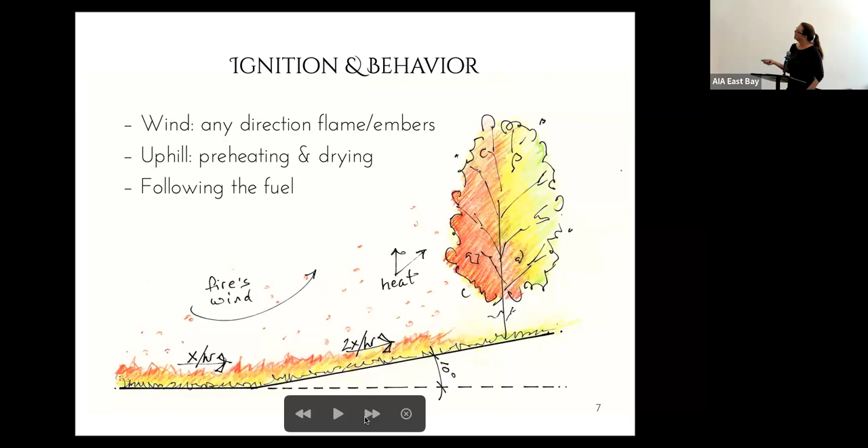Okay, so getting back to that critical thinking path. Obviously, wind will send embers wherever. They're like plankton. They can't go against the current, and they can ignite something by direct contact. They'll bring that heat, and if it's enough, they'll ignite the next thing. The flame front is also super obvious for our critical thinking path as it's climbing up, following fuel. That's really intuitive to understand. You can see that everywhere. And having something burning nearby so that that heat energy transfers by an indirect means.

I took a class on firefighting at Merritt College, and the best point I got from that class was that the biggest threat to your building is the building that's on fire next door. That next door building is the biggest threat. That's really terrifying if you know your neighbors.

Is this the next slide? Whoa. Oh, we're on a roll. There we go.

Okay, so the defensible zones were developed in the 50s and 60s as a theory. We've totally studied it now scientifically and demonstrated that the defensible zones were a good theory. They are there to delay ignition and to minimize exposure, to slow the fire's progress, to basically put tacks in its path as much as we can, to lower the flame height. Anytime you can take a fire, and I'm going to use this word badly, calm it down, literally down, and lower that flame height, the fewer things it has a chance to throw, and just get it down where it's much more manageable, and reduce its intensity.

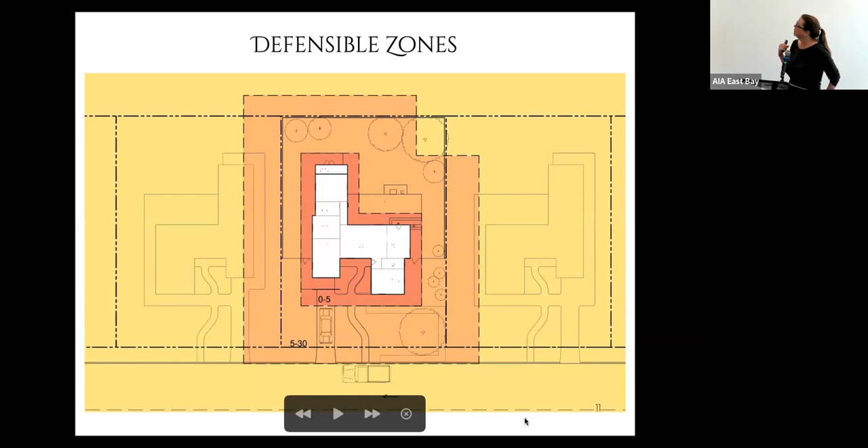And when we call these spaces defensible, there's a lot of assumptions that I think happen for lay people. They assume it will be defended. That's not necessarily true. We need to think of them as a way in and out, and they have limitations. So embers don't care if you've drawn a line in the sand. Okay, next slide. So the defensible zones are just demonstrated here on a modest house. I would skip all the nooks and crannies and just call the 0 to 5 the outside walls. And if there's a nook or a cranny, don't get too fussy about trying to cut those inside those corners. Next slide.

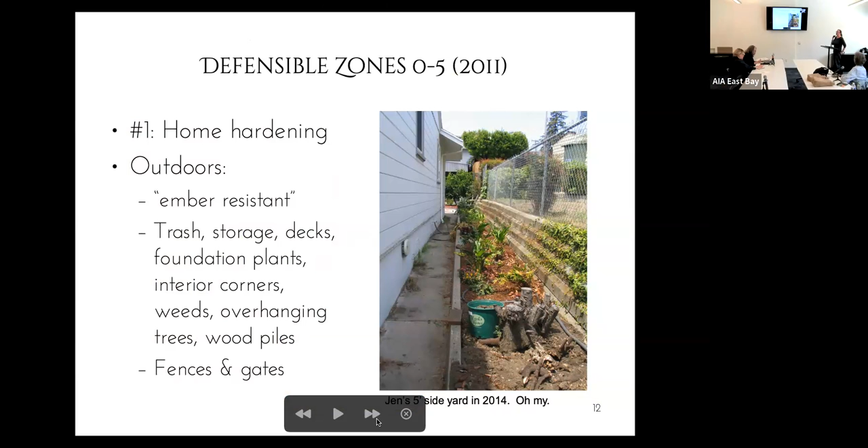Okay, so this is one of my side yards. It's 5 feet wide. What the heck am I supposed to do when my path is only 2 feet wide and the whole property line is 5 feet from the building? So number one, home hardening. Number two, in the out of doors, we want things to be as clean and tidy, ember resistant, and difficult to ignite as possible. Next slide.

And the 5 to 30 zone is pretty much just an extension of the same thing, but we want to also not forget things like sheds, pathways, long driveways. All of that stuff should also be defensible so that you have a way out and they have a way in. I'm going to skip that business about the neighbors for time. Next slide.

Okay, so like I was saying, the way out along driveways, paths, trails, if you're counting on using a particular route to get out of your neighborhood, you might take a real close look at that. Or if you have a home that's more rural, really look at how you can get out of there. And what if the main way is blocked off? Is there another way out? It's not one and done. You've got to maintain these defensible zones. You can't just buy them, put them in place and call that good. Next slide.

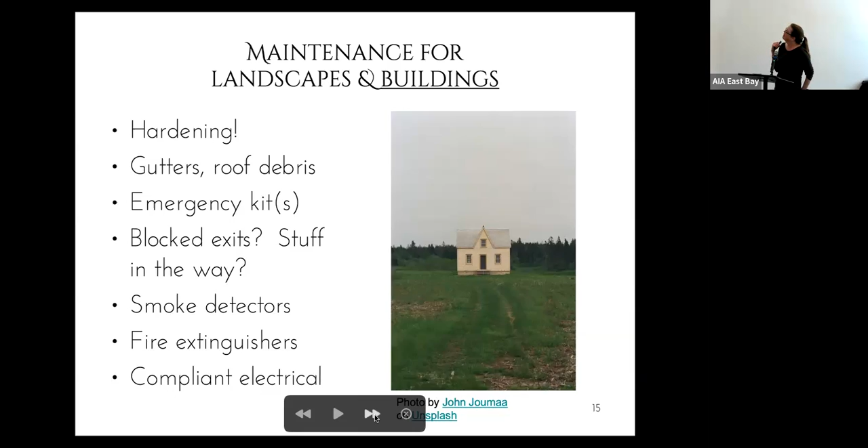Okay, so maintenance for landscapes and buildings. I'll focus on buildings here. Hardening, obviously, gutters and roof debris, having those emergency kits and your go bag, blocked exits. I have a downstairs at my house and the back door we hardly ever use. And I was storing things in front of it. And then I started studying fire and I went, oh, okay, no, let's not do that. Making sure your smoke detectors are up to date, having fire extinguishers, and your electrical work needs to be compliant, needs to be solid so that it doesn't create heat and cause a fire. Next slide.

Okay, landscapes are much more my jam. So hardening your outbuildings, sheds, pool, those little sheds that you put pool equipment in, all of that stuff. No trees should be overhanging your roof line. Your egress paths need to be clear. You want to keep the corners clean. You'll see that in the next slide. Doormats, this is something I picked up from Cheryl Miller. If your doormat is really easy to ignite, like those jute things, maybe it shouldn't be in your path out of the house. And not stockpiling firewood and mulch really close to your egress paths where it's easy to get to. We've got to rethink that. Next slide. Here we go.

Seasonal cleanup, obviously, thanks to this slide, is important. Pruning your plants, your trees and shrubs for their health and not just shearing them into rectangles is important. Next slide. Keeping the corners clean. Anywhere leaf debris and dry little stuff and trash can get blown into, embers will collect there. So you've got an obvious, really intuitive way of understanding where your vulnerability to embers might be.

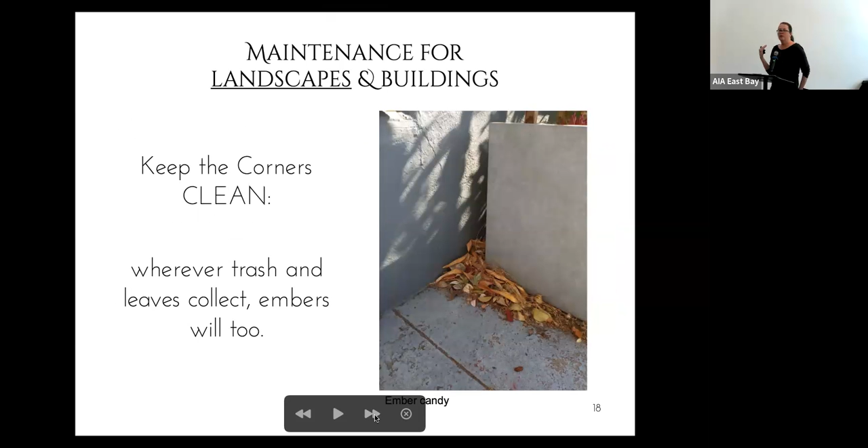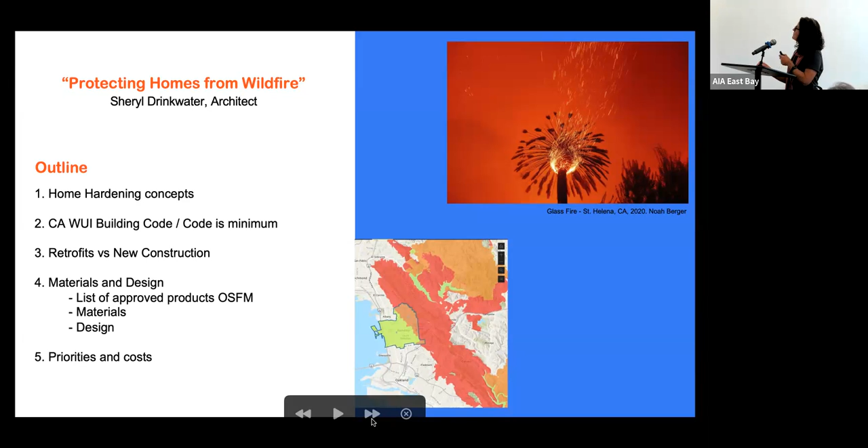So we are going to be covering these areas. And I'm kind of curious, maybe in the Zoom, in the chat, I'm just wondering if anyone has never heard of home hardening. I mean, everyone here in this room, I believe, has, but on the Zoom, I'd be interested to know. We're going to do kind of a quick deep dive into these sections, 5 sections in 20 minutes.

So home hardening. When I was in Paradise, as I mentioned, I was an inspector for the state. We saw a few different outcomes. We saw a number of homes that showed no damage. Some landscape structures and accessory buildings were damaged, maybe destroyed. But a lot of these newer homes survived. So they were built to the newer code. So that's something to think about as we go through this.

Research shows that the risk to your home is likely to come from flying embers. This is something that Jennifer mentioned. Using science, we fortunately know a lot of the risk factors now that lead to these wildfire disasters. And we have a good understanding of it all through something like this image, which is the IBHS, Insurance Institute for Business and Home Safety. They have this big laboratory in South Carolina. They build full-scale structures, and then they hit them with these fire cannons, which simulate embers, and then they study the results. And we're going to see another image in a minute.

So home ignitions result from conditions local to a home. Again, Jennifer has been great at doing the background on this. So the vulnerabilities principally determine those ignitions, and this area of the home and its immediate surroundings is called the home ignition zone. This was one of the first times we heard home ignition zone, probably almost 30 years ago, by Jack Cohen. He is a scientist, a forester for the Forest Service. He's kind of the grandfather of home hardening.

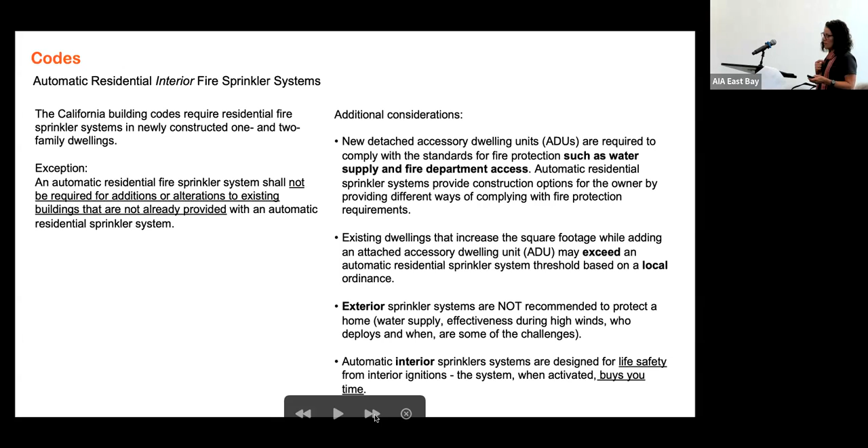Okay, so we're going to touch on retrofits versus new construction. So it's much easier to build a hardened home from scratch. New homes can meet the requirements starting at the design phase. And we were talking about this before we recorded that there are over 7 million existing structures that are at risk for wildfire. We got a lot of work to do just to convince people with these existing homes to harden them in any way, whether we're doing a project or not.

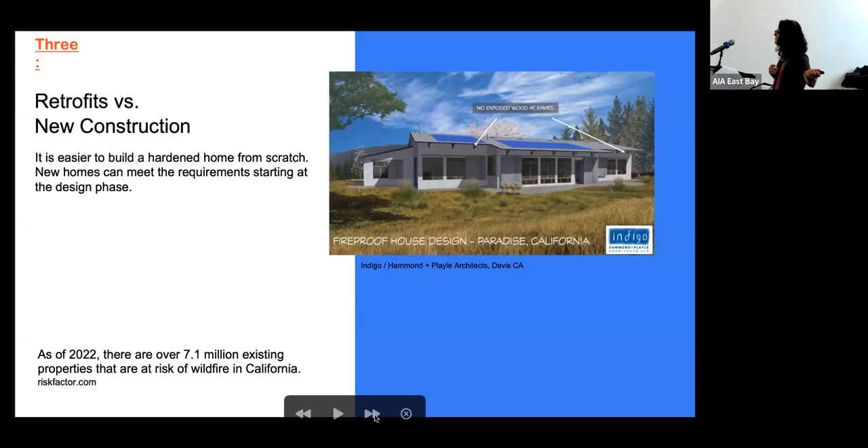So this is one of the good examples to show for retrofit and for new: eaves and roof vents. This is a big retrofitting project that can be very simple and it can be very complicated. There are so many designs, right, for roof overhangs and roof eaves. So we probably all know that vents are designed to create airflow and remove moisture above and below the living space, but they also create air pressure that can draw the embers inside and ignite the combustible materials that a lot of us might keep in our attic or crawl spaces.

So the code and the voluntary recommendation is to use approved ember resistant vents, which there are many products. For example, the gable end vent here has a bushfire mesh, a proprietary vent that has a very tight steel mesh. We can retrofit an eave with a closed soffit, like in the example at the top. It can be vented or not, depending on the roof assembly. And we can voluntarily screen the vents and retrofit eaves. And here the recommendation is 1/16 to 1/8 inch. So it's smaller than the vermin size, which is typically 1/4 inch, to prevent critters from going through these vents.

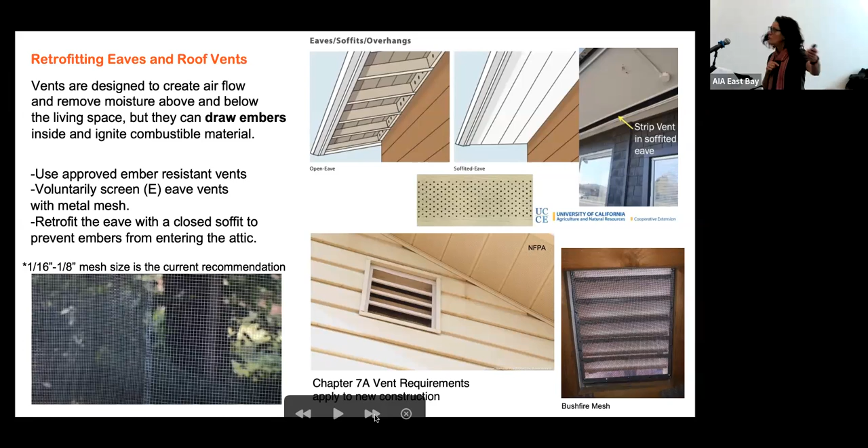So now we're going to move into materials and design, which I think of as the meat of the talk. And hopefully my time is okay, but this is a demonstration that was done in Marin by Fire Safe Marin. They have an annual event now called Ember Stomp to educate the public. And so they build these little mini versions of the lab. Steven Quarles is usually leading it. He worked for IBHS. He's one of my heroes in this subject matter. So they build these little sample home sites using cedar shingle and typical home materials on the right.

And on the left, they have a quote unquote hardened home: siding is fiber cement, they've got the vents that are ember resistant, the metal gutters, and then they built a little deck and they ignited everything. And then they studied the results. They illustrated to everybody that materials do matter and that your deck is also a huge vulnerability, and even the little things on it, right? So the deck is maybe just a vehicle for all those little things to ignite your home. It might not be the deck itself. So as you can see, the one on the left, the deck is pretty destroyed. Sort of.

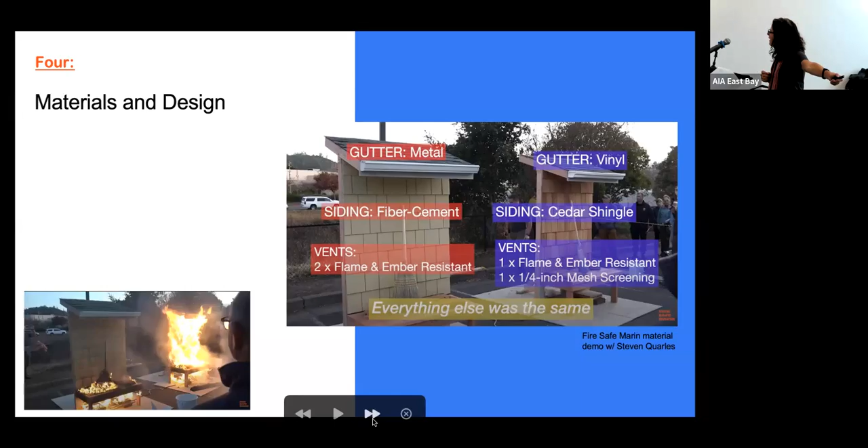Not all products out there that comply are in the book, but this is just a way to group it all together to make it easier for architects and homeowners and different manufacturers to show their products. And all I would say is if you are considering using a product and you're not sure of it, do your research, ask a lot of questions of the manufacturer, and ask for the testing information and use that testing information. Possibly it will be required to submit for permit, but just do your due diligence.

So wall assembly, we're in materials. Fire resistance rated refers to the rating of a building's wall assembly's ability to contain a fire inside that compartment and protect it from spreading. This is like that 1 hour fire resistance rated wall example I just gave, or a 20-minute fire rated door. This is really, again, about life safety. This buys time. If you're in your home and you're trying to evacuate and the wall takes longer to burn through, then you have a better chance of surviving. And this can also help your home as well.

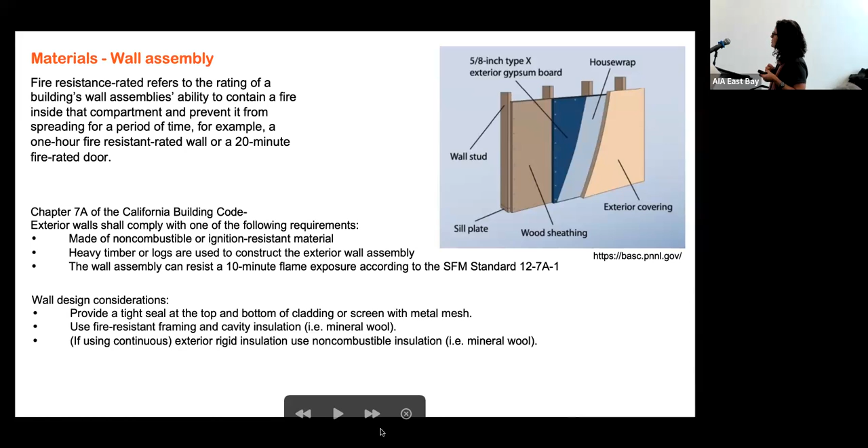Other wall design considerations: provide a tight seal at the top and bottom of the cladding or screen with metal mesh. Stucco walls kind of have this built in, but we'll see a detail of that in a minute. Use fire resistant framing and cavity insulation like mineral wool. And if you're using an exterior rigid insulation, use non-combustible, like mineral wool.

So here's some more about siding. Stucco, if it's 3 layers, almost 1 inch thick stucco assembly installation, that's probably the easiest way to comply with Chapter 7A for a non-combustible wall, as long as it's maintained. You can use metal, fiber cement; please use the manufacturer's instructions. And on the right, I just show that you should consider the edge details of your siding.

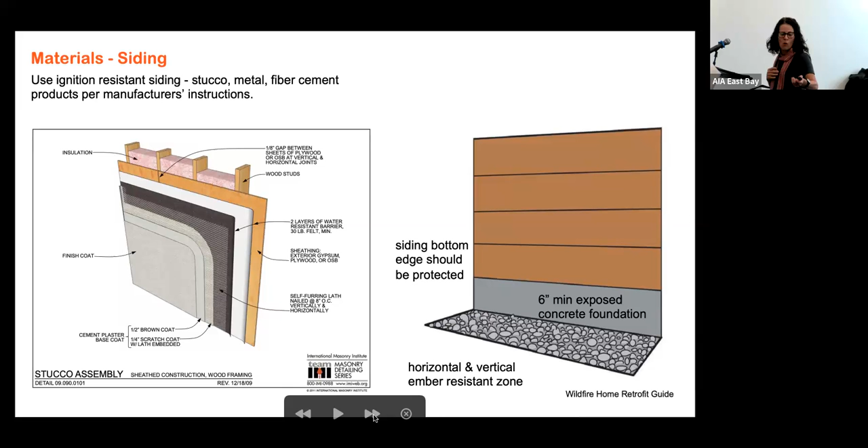And also with new construction, we are required to have a 6-inch minimum exposed concrete foundation. So this is kind of like a little vertical version of your zone 0 to create a disconnect for those embers that may hit the side of the wall and fall down. If they have nothing to ignite, they're just going to extinguish.

So the roof, I've got to speed up. A class A rated or non-combustible roof gives the highest protection. Wow, my formatting went nuts here. Anyhow: standing seam, terracotta tile, and then class A rated by assembly. This is all underneath that image, but basically it's saying that you have to have another added underlayment material like gypsum wallboard or ignition resistant plywood. And this would create a class A roof by assembly.

And then you want to consider all the details of the roof edge where the gutter attaches. And also if you have a 2nd story and a roof intersecting, this would be more of a retrofit, make sure you have flashing installed there to create a disconnect.

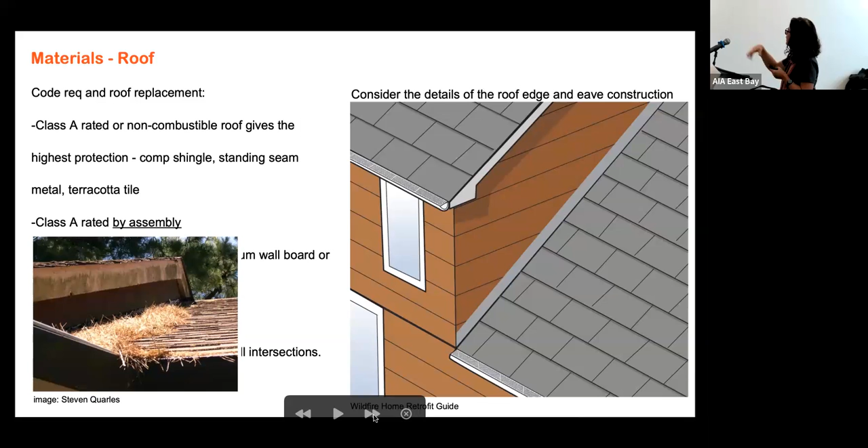Windows, the glass can break. I'm going to speed up. It occurs because of the differential in the temperature changes: the radiant heat might be right on the center of the window glass, while the rest of the glass is in the frame, so it cracks.

Chapter 7A requires multiple panes and at least one pane of tempered glass, which is stronger. And window frame materials matter. Metal clad, aluminum, fiberglass, they're all better than, say, vinyl.

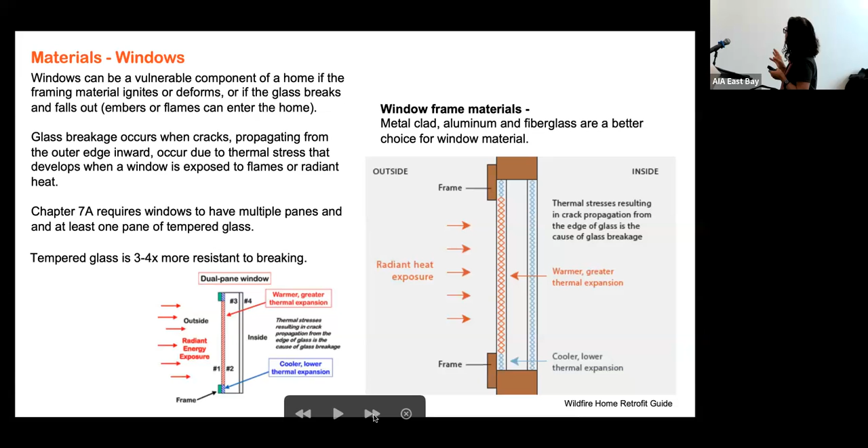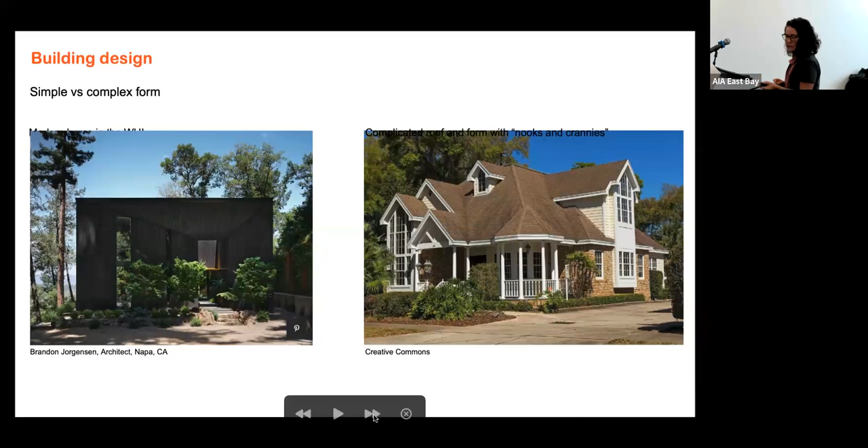And then this is a firm in San Diego. I met this architect down in San Diego, and she and her partner have started a company that has a method, and they know exactly how much it's going to cost. They use all the same materials. They have floor plans. It's customizable. And as you can see, the form is fairly simple.

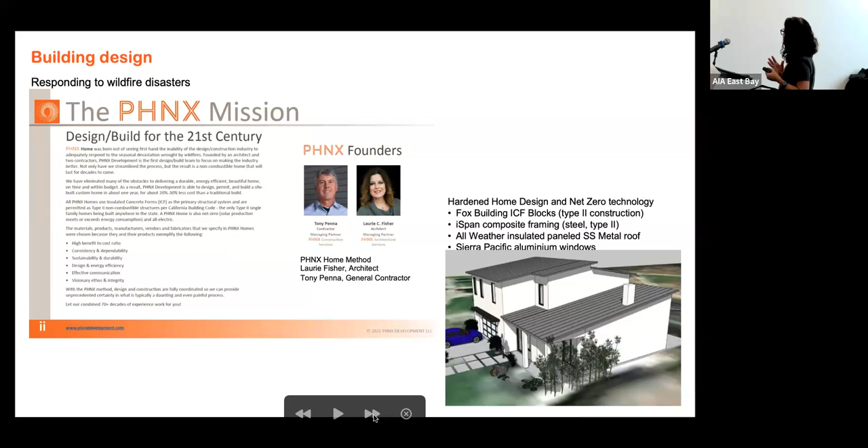It has shed roofs. They use Fox blocks, which are insulated concrete form blocks that get stuccoed. They have steel framing, insulated paneled standing seam metal roof, and aluminum windows.

And then here's another architect building a home in the Sacramento Valley, and he actually consulted with me, and he's using class A membrane flat roof, metal fascia, aluminum windows, aluminum clad windows, fiber cement siding, masonry, metal guardrail.

And then we have this firm, Indigo, Hammond and Playle Architects in Davis. They're working also on a template for homes for victims of the Paradise Fire that use corrugated metal roofs, concrete masonry or stucco. And they're also very interested in off-grid solar battery systems so that there's the potential to shelter in place during the wildfire.

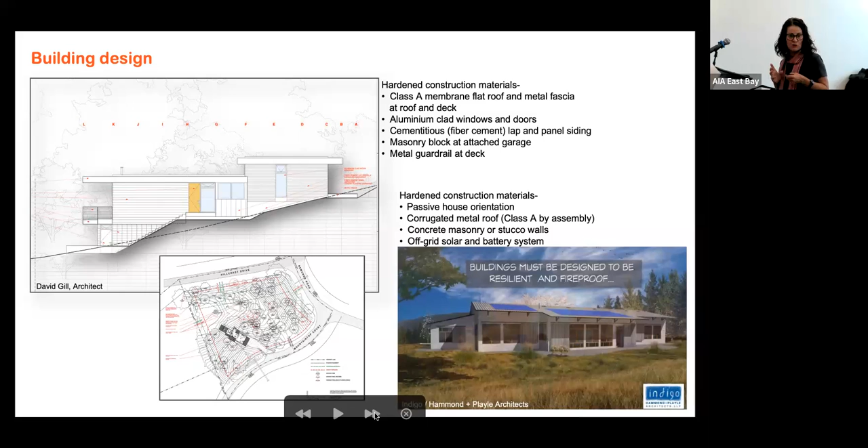And then we all know Arkin Tilt Architects here in Berkeley. They have been working in straw bale construction, clad in stucco, for years. They have all these plans that they're actually giving away to victims of Paradise and other California wildfires.

Another company, Bone Structure, they have a steel frame kit, very customizable, high-end triple pane windows, unvented roofs, and high performance insulation, which you'll have to go read about on their website. I'm not going to dig into the challenges of that right now.

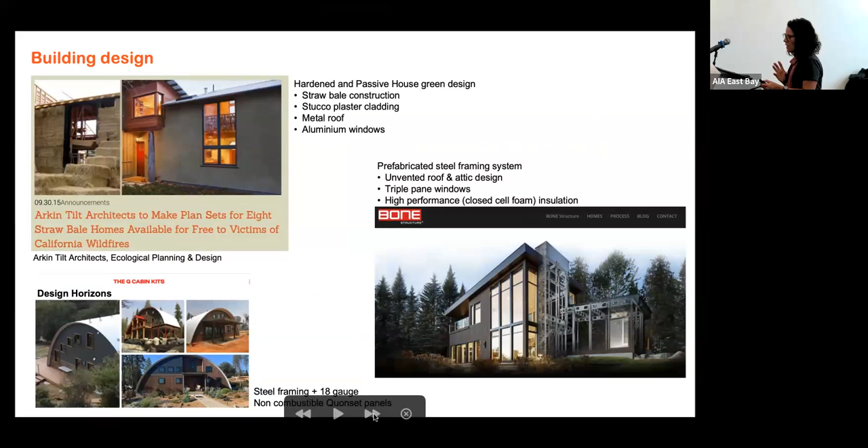And then Design Horizons. Thank you. Design Horizons has a very proprietary kit house that they are selling in Paradise called the Q Cabin. And they use steel framing and these non-combustible Quonset hut panels. It's kind of like a little kit of parts, and they're very customizable.

And we're just wrapping up here, priorities and cost. This is a great diagram that I like. It's very simple to understand. It basically says the roof is your highest priority. It also happens to be one of the higher costs, but it is probably the most important thing you can do to protect your home.

Jennifer talked about it. A couple of ones to point out is maintenance. Maintenance actually is the highest priority of them all. And I mentioned that at the beginning of the talk. That is not a design talk. That is a homeowner clean up your property talk, but there's lots of things you can do.

And siding is another one. I get asked all the time, oh my gosh, I have beautiful redwood siding. Should I take it all off? And I say, no, don't take it off.

I'm taking some of Cheryl's time. We already did it by pre-arrangement.

Siding is one of the highest costs, and it's one of the lowest priorities. I just wanted to add that.

And then this is the CAL FIRE low cost retrofit list. This is a lot of recommendations, some of which you just heard about here, and a lot of references to the state fire marshal's products handbook.

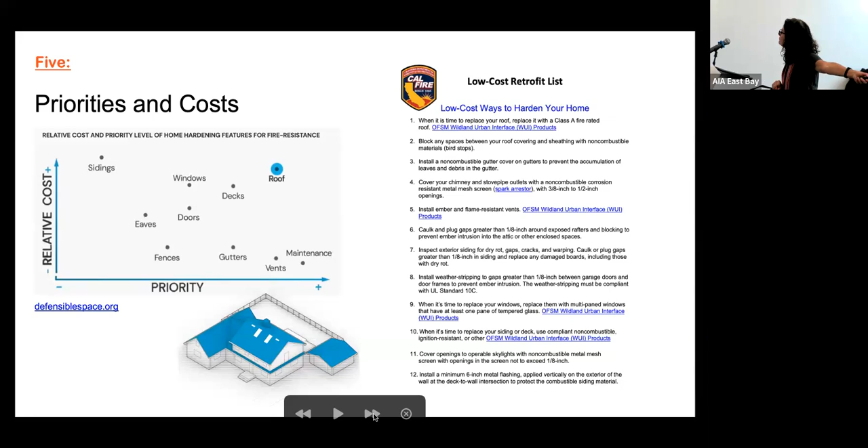And data being collected everywhere by CAL FIRE and others. This is a graph that shows for the Camp Fire in Paradise that the homes that were newer, no damage, almost 51% survived. Whereas the older homes built before 2008, almost 80% of them were destroyed. So newer construction to the newer code matters.

And then this is a report from 2018 that shows that a hardened home is similar in building costs to a typical home. And very simplistic, they broke it down into just 3 components. This is Headwaters Economics, and they show that it's about the same. Okay, so very simplistic, but they didn't stop there.

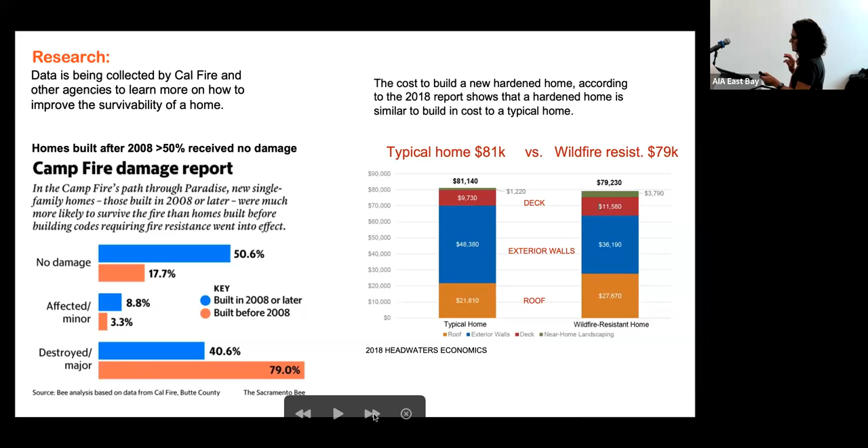They went ahead in 2022 and did a California edition, which I think is really very important. It's a great document. Everybody should download it. It has a lot of information on just about everything. And anyway, it's California specific. California is a special place. We're on the forefront of all of this, having structures survive.

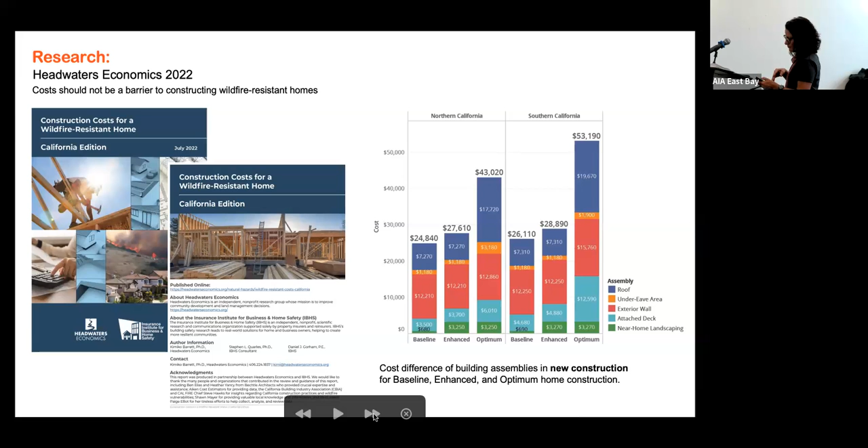Actually, that was a different letter.

So to wrap up, I just wanted to share these departing thoughts. We have to rethink how we design for remodels, additions, and new construction. And we may be able to do better. Codes are just the minimum. And we should encourage buy-in for these actions from homeowners with recognition that home hardening will increase the value of their home. And Cheryl's going to talk a little bit more about some of that.

And we hope that insurance companies are going to be listening and watching, and real estate companies, of course. And we should learn how to incorporate zero net energy and green building concepts into our homes, our designs. And thank you very much.

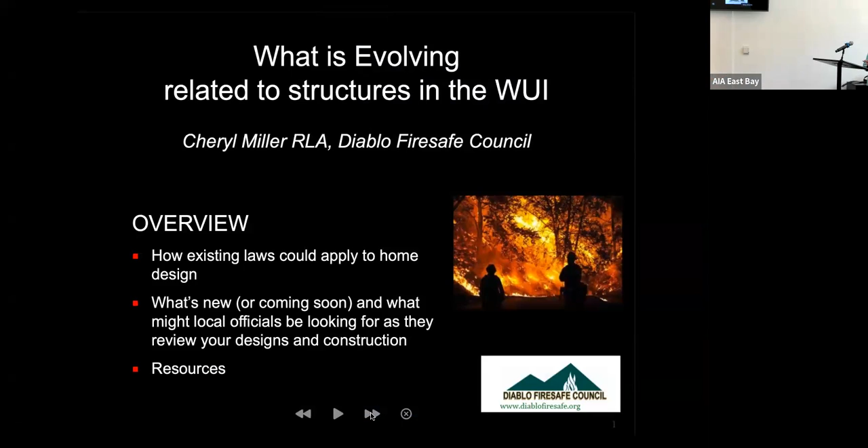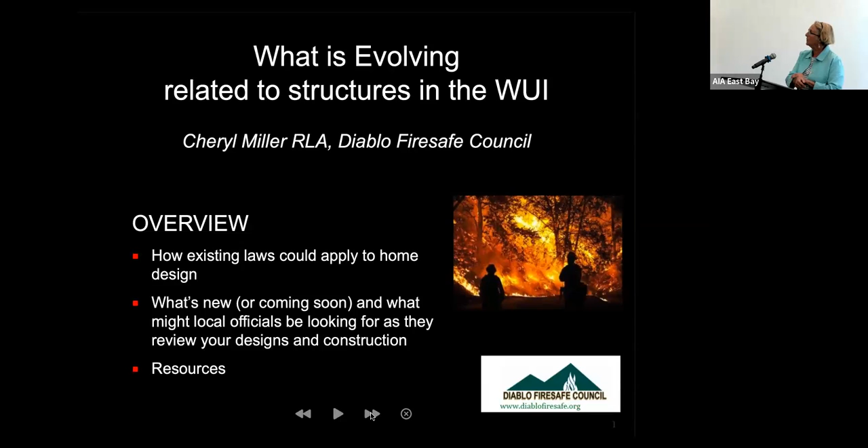So I'm going to wrap up our panel and really bring it into what's evolving, what's going to be new. I'm going to cover 6 areas, and we're going to look at the wildfire laws, and that really is our system of wildfire prevention: we have these various state and local laws, and we have some enforcement mechanisms, but stuff is really changing. So I want you to think about these 6 areas that are evolving, and they may inspire you to evolve your practice. We're going to start by thinking about how those laws really apply to us as professionals and as designers and builders.

And the first most obvious is really the design related things. Your design is probably going to go through a plan review and have permit requirements, and you're going to be asked, if you're working within a wildland urban interface area, high fire area, to comply with certain things. Your client may be even more concerned than the laws are. So you may have a client that's really worried about fire insurance, or maybe you're doing a remodel or retrofit or an expansion and they've had their insurance dropped. They may be getting ready for a real estate sale, or just have bought, and there are some issues with the real estate laws now.

And then the last about this design related area is just your own business liability for ignition. They haven't come after designers yet, but they potentially could in these fires that are not quite as big. So you always have a liability with everything we do in our business. And then the second area is all about our professional standards. We hope that you've joined us today so that you learn what is the standard of care, what is your obligation to your clients, and hopefully you're interested in more sustainable designs. And we clearly know that wildfires are with us to stay.

The last thing is a funny term that we use in the fire area, which is called authority having jurisdiction. It's usually your local fire department and your local code enforcement, but sometimes there are big issues with who actually has jurisdiction. So understanding who's inspecting properties, who's putting down violations. If your client comes to you later and says we didn't comply, what does that mean? Because you'll find as I continue to talk that the local jurisdictions are kind of all over the map with how they enforce stuff. And that's just a big take-home message. You're going to hear me say it again and again.

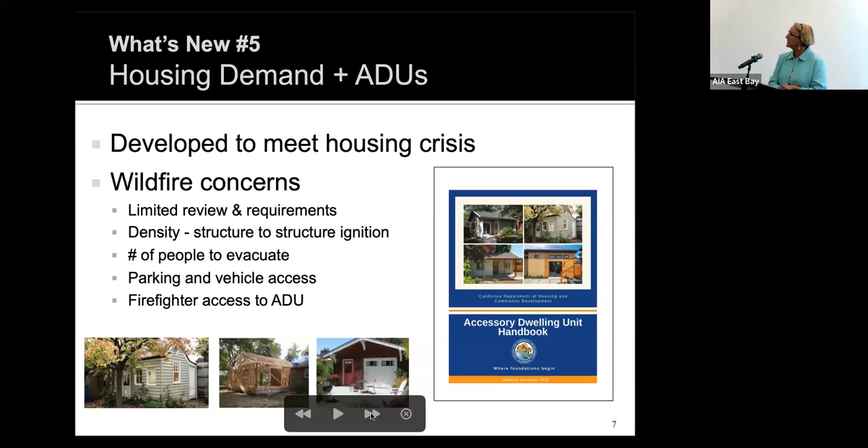Where do people park? There's only so much we can do, but certainly the ADU guidelines right now don't have anything to say about fire. And if you're in a high fire area, for your own ability to sleep nights and your own risk of your firm, I certainly would recommend that you think through things like the Chapter 7A or R337 and other requirements. And then my last is a little incentive.